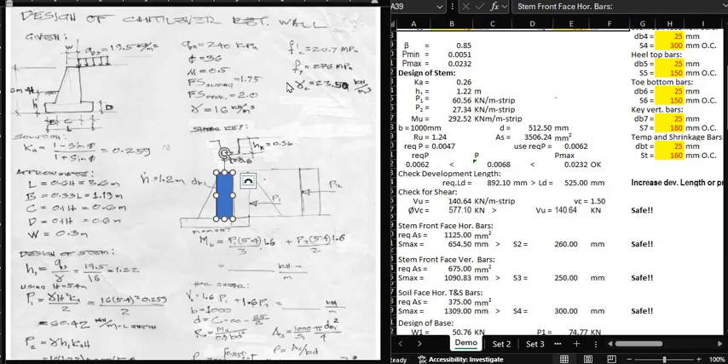Hello, so our retaining wall now is cantilever type. Ito sa left yung pattern and then on the right is the sample. It is termed cantilever in the sense na meron tayong, let's say, meron tayong beam dito. So ayan yung beam, and then naka-fix siya sa baba. Tapos merong lateral load dito sa beam. So ayan yon. And then etong cantilever beam, i-design natin yan as singly reinforced beam.

Okay, so let's look at the dimensions. Ang minimum width ng upper base, W, is 1 foot or 0.3 meters. And then the other dimensions will depend on the overall height, which is the dimension from the base of footing to the top of wall. In this sample, 6 meters siya. Yan yung capital H.

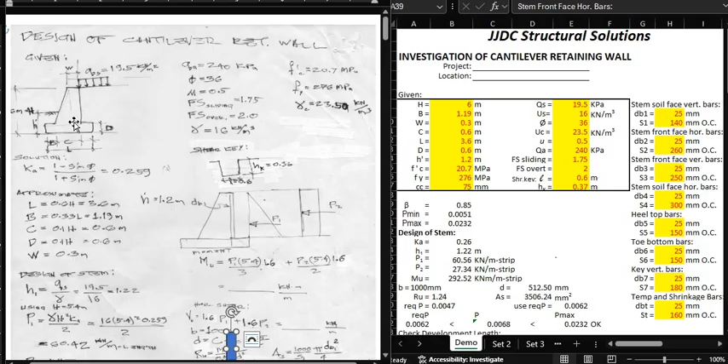And then, yung length or the footing dimension L is 0.6H or 3.6 meters. Tapos, by the way, yung parts ng retaining wall, you have the stem, which is yung cantilever beam niya, yan yung stem. Tapos dito yung heel, kumbaga yung sakong ng paa, and then ito yung toe, yan yung kuko ng paa. Okay, so this is the stem, this is the heel, and then the toe. Now, the B, which is the length of the toe, is 1/3 of L, or this is 1.19.

By the way, these dimensions are approximate only. And then yung C, which is the lower base of the stem, is 0.1H or 0.6 meters. And then yung thickness ng footing, D, is 0.1H or 0.6 meters. And then para sa given, naglagay tayo dito ng surcharge na 19.5 kPa.

And looking back here at the sample, ayan na yung mga data natin. So yung mga red, input data yan, ano? So we have H, B, W, C, L, and then D, then yung H prime naman, okay, this is based on your given data. Okay, so ikaw mag-specify ng H prime. And that is the dimension of the soil from the face of the retaining wall measured from the top to the bottom of the footing.

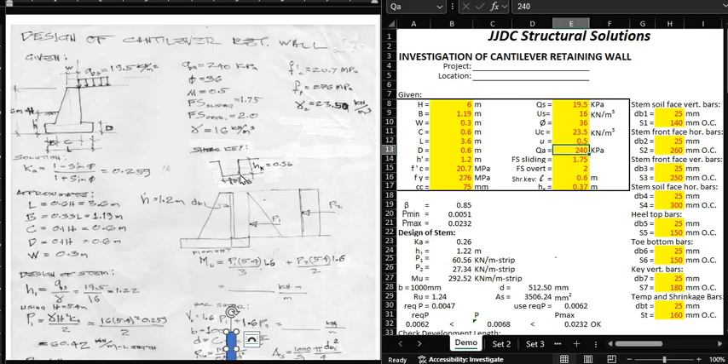And then, your soil bearing pressure, or Q allowable, is 240. And then, factor of safety for sliding, 1.75. And then, overturning, 2. And then, yung dimensions ng shear key, okay, input data na rin ito. That is, the height of key is 0.37. And then, yung length ng shear key is 0.6.

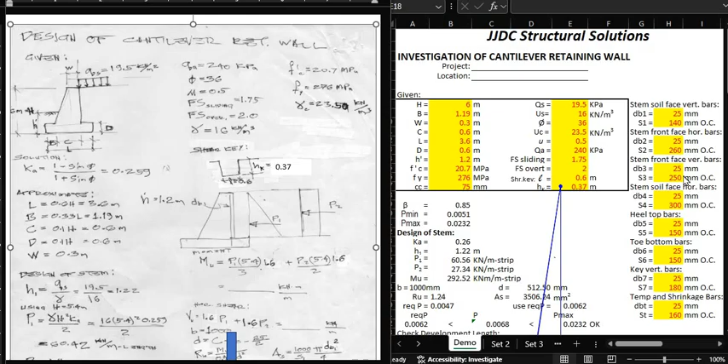And then, let's look at the reinforcements. Dito sa stem, meron tayong soil face, or it is the part of the stem na nakatikit sa retained soil. And then, yung front face, ito yung exposed part ng stem. Okay? So, DB1, this is stem soil face vertical bars, yung solid block na nakatayo. And then you have spacing, S1.

And then stem front face, so dito tayo. Horizontal bars, so yan yun, yung mga bilog-bilog somewhere here sa front. Yan yung DB2. And then DB3, that is stem front face vertical bars, yung solid block dito sa may front face.

And then heel top bars, DB5. So dito yan, yung solid line dito sa may heel. And then toe bottom bars, yan yung DB6. Ito. Okay? Toe bottom bars. And then key vertical bars, DB7. Ayan siya, yung solid block, DB7.

And then lastly, temperature and shrinkage bars, DT. Okay, so meron tayong temperature and shrinkage bars dito sa toe. Then meron din temperature and shrinkage bars dito sa heel, yung mga bilog-bilog na yan. And then dito sa heel, meron ding temperature and shrinkage bars. However, dito sa stem, wala na tayong temperature and shrinkage bars kasi nandyan yung D1, DB1, DB2, DB3, and then DB4.

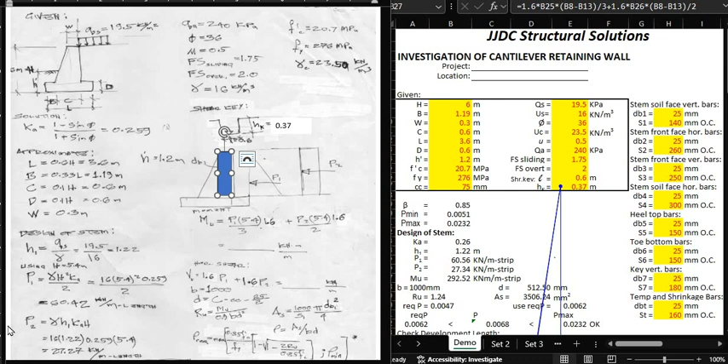By the way, in the pattern it's 60.42, but in the Excel sample it's 60.56. Why is that? Because we didn't use 0.259. But if we use 0.259 exactly for K sub A, it becomes 60.42. I hope you're not confused by that.

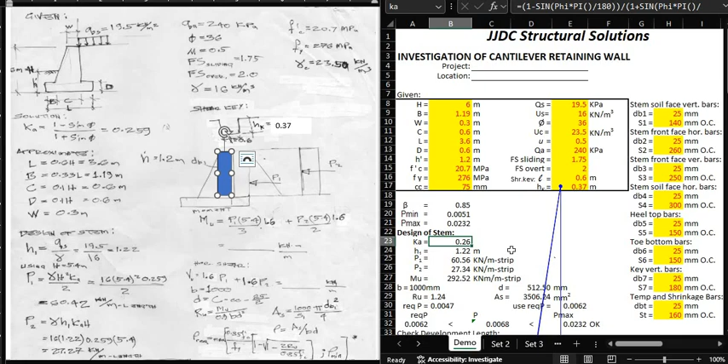Next, we now go to P sub 2, which refers to the surcharge, and that is unit weight times H1 times K sub AH.

Now for P2, instead of using small h1, you can also use surcharge QS times K sub A.

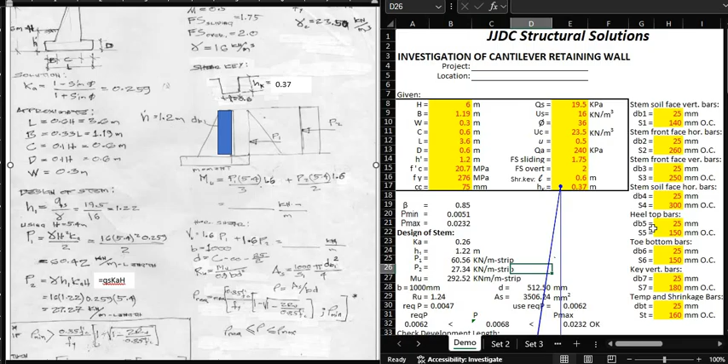So let's check. Let's go to Excel. This equals surcharge times coefficient Ka times the height or thickness H minus D. Enter. See, they're the same, 27.33758.

Now, here we used QS times Ka times H, and our H here is 5.4. Why did we use H1 here, which equals surcharge divided by unit weight? This is in the sense that we converted the surcharge into an equivalent soil load, so we divided the surcharge by the unit weight of soil, which gives 1.22.

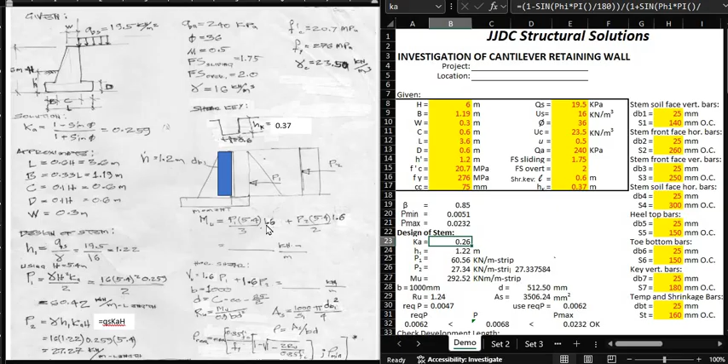Kinonvert ko na siya na 1.6 kasi dito sa surcharge, let's say, kalsada yan, merong mga dumadaan pa rin yan. Kaya nilagay ko siya na 1.6. Mas malaki yung moment na i-produce natin kapag 1.6 ang gagamitin natin. Kaya for conservative reasons, 1.6 na lang ang inilagay ko. And that's how you get M sub U.

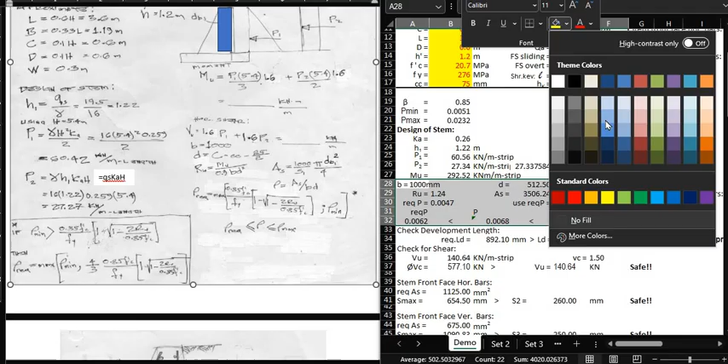Next is dito na tayo ngayon sa design of singly reinforced beam. Let's say meron tayong beam section, ang width niya ay small b, tapos ang effective depth niya ay 512.5. Bakit 1,000 to? Kasi we are considering meter strip. Kaya fix yan na 1,000 mm. Tapos yung D, ayun no, 1,000.

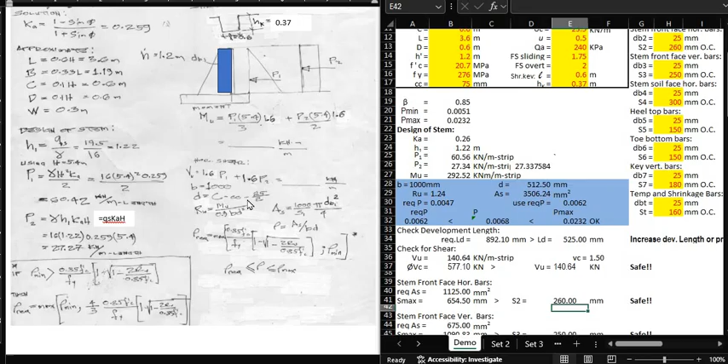And then your D is thickness C minus clear cover minus 25 all over 2. Ang C natin is yung dimension ng lower base. Tapos meron tayong clear cover. Tapos yung 25 all over 2, that is the diameter of

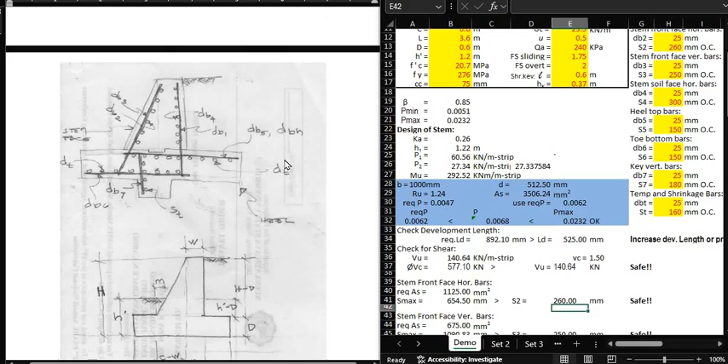DB1. Okay, so check natin kung saan nakalink yan. Ayun siya, nakalink siya kay DB1. Okay, next.

So balikan natin ang design ng singly reinforced beam. First is, sosolvin mo yung R sub U, which is based from MU all over BD squared. And then solvin mo rin yung AS. AS is equal to 1,000 divided by S1 times the area of DB1.

Bakit natin siya dinivide ng S1? Kasi ang ibig sabihin yan, malalaman mo yung number of pieces sa loob ng isang meter strip. So ayan yun, this is linked dito kay DB1 tsaka kay S1.

After which, sosolvin natin si required rho, which is equal to 0.85 f prime c all over fy times 1 minus square root of 1 minus 2 r all over 0.85 f prime c, which is, ayan.

Ngayon, i-compare mo si required rho kay rho minimum. Take note, kapag si required rho ay mas maliit kay rho minimum, no? If required rho is less than the rho minimum, then you have to recompute your required rho, which is the maximum of rho minimum and 4/3 of this equation.

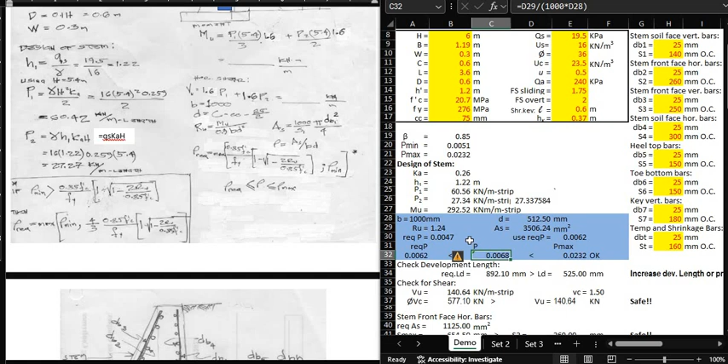Ngayon, kung nag-fail ito, then you have to change your spacing or your bar diameter, or worse, yung mga dimensions natin. After this is check development length.

Siyempre, ang i-check nating development length ay yung DB1, which is ito, yung vertical bars dun sa soil face. Ngayon, ang actual development length is D minus clear cover. Take note na ang development length natin ay yung nandito sa footing, hindi yung nasa stem, kasi obviously mas mahaba itong nandito sa stem.

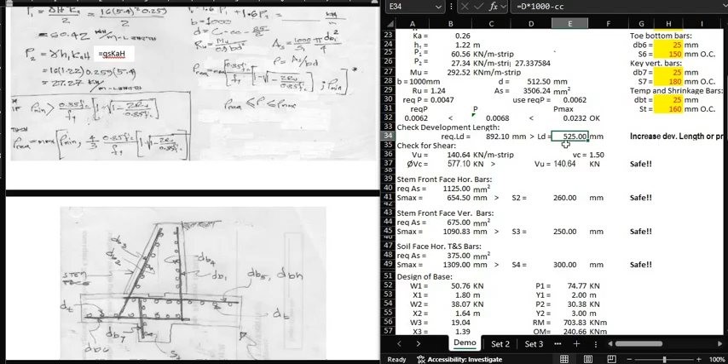Kaya ang checkin natin ay yung critical na development length, which is at the footing, which is equal to D minus clear cover. And your actual development length should be greater than the required development length. How do we compute for the required development length? So eto siya.

It is the maximum of this 1, 2, 3, 4 equations, no? 0.02 dB1 squared. Ang involve natin dito ay si dB1, divided by 4 square root of f prime c, and then 0.06 dB1 fy, tapos 300, tsaka fy psi t psi e dB divided by 2.1 psi, and then square root of f prime c.

However, you be careful with yung 2.1 kasi may possibility again na baka magpalit ito ng 1.7, which is actually ayun, 1.7 nga ang ginamit, no? Hindi siya 2.1, dito 1.7. Okay, next.

Ngayon, napansin natin na yung actual development length is less than the required development length. In that case, ang first defense mo dyan is mag-provide ka ng hook. Kaya naglagay tayo dito ng comment: increase development length or provide hook.

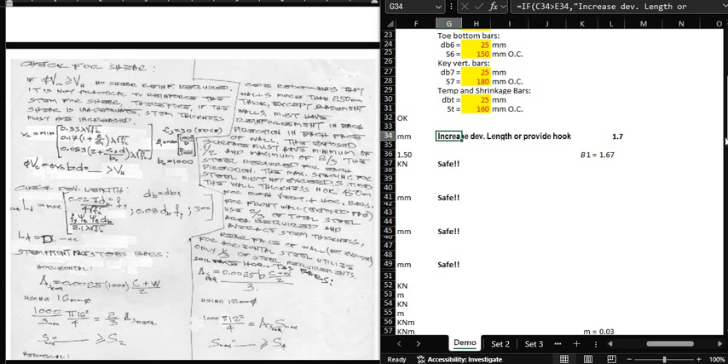Ngayon, dun sa strap footing, eccentric concentric, nag-provide tayo dun ng equations para sa development length, ano? Pero dito hindi ko na nailagay. Dagdagan nyo na lang kung gusto niyo. So yung first defense natin dito ay mag-provide ka ng hook.

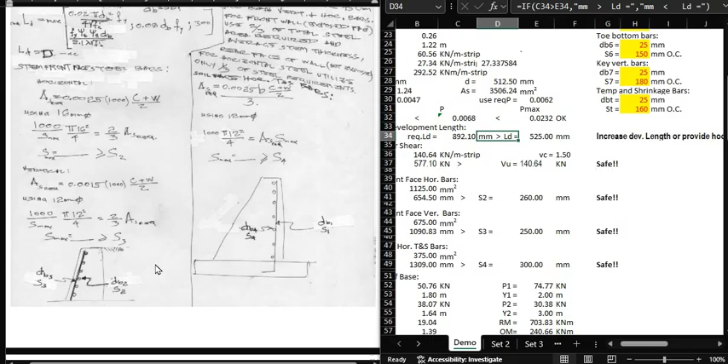Next is, kung kulang pa rin yung hook, then i-extend mo yung development length. Magiging letter L siya dito, or pwede rin mag-letter L siya papunta dito sa kabila as long as na ma-develop yung length.

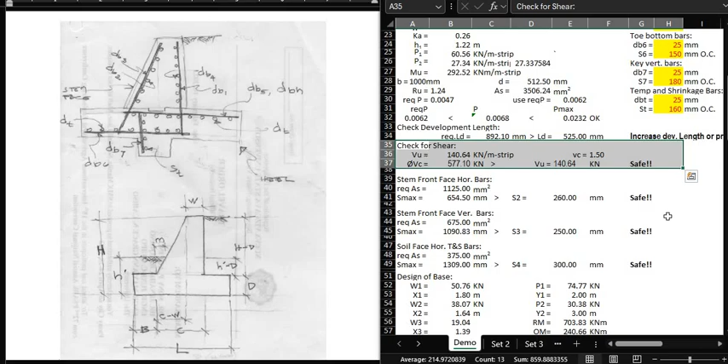Next is check for shear. Babalik tayo dito. VU is 1.6P1 plus 1.6P2. Ang shear na chine-check natin is in between the stem and the footing. So dito mangyayari yung shear. Kaya ang shear force natin is P1 plus P2, multiply that by 1.6, and that is your shear force VU.

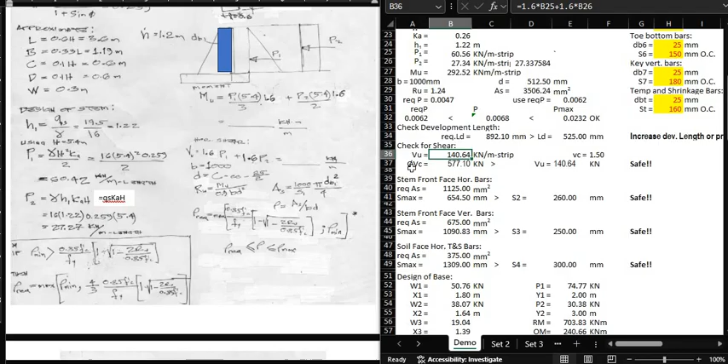Okay, and then how do we get the allowable shear force phi VC? So ito yon, allowable shear force phi VC. Kukunin natin ngayon si allowable shear stress VC, and then you multiply it by capacity reduction factor phi times BD. Take note na itong phi na yan, hindi yan yung angle of internal friction, okay, malilito dyan. This is 0.75.

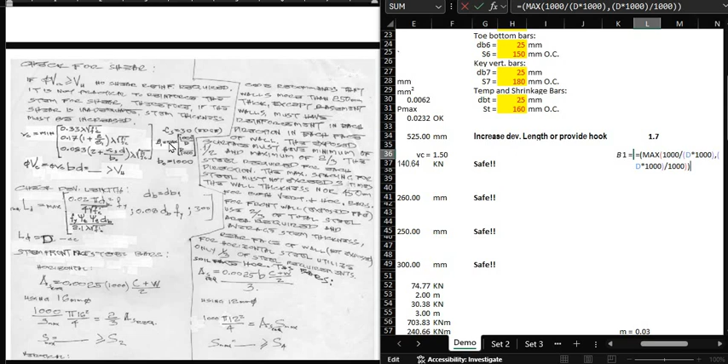Next is ang ating 30, tapos beta 1, kinompute din natin si beta 1. Nandito si beta 1. Maximum, beta 1 is maximum of 1,000 all over D or D all over 1,000.

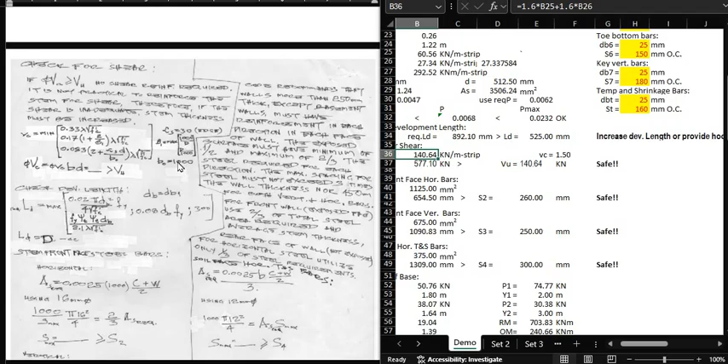Next, ang B sub O or yung shear perimeter is 1, or shear length is 1 meter kasi yan yung meter strip. And then ang allowable shear force natin ay equal to 0.75, yan yung phi, times allowable shear stress VC, eto nakalink siya doon, times B na 1,000, meter strip, times D na 512.5. Then you divide that by 1,000 para maging kilonewton.

Okay, so your allowable shear force is 577, which is greater than your VU. So therefore, it is now safe.

Now let's go to stem front face steel bars, which is dalawa, no? Meron tayong horizontal tsaka vertical. So let's start with the stem front face horizontal bars, which is ito. Stem front face horizontal bars.

So ang AS required natin ay 0.0025 times meter strip times the quantity C plus W all over 2. Ayan po siya.

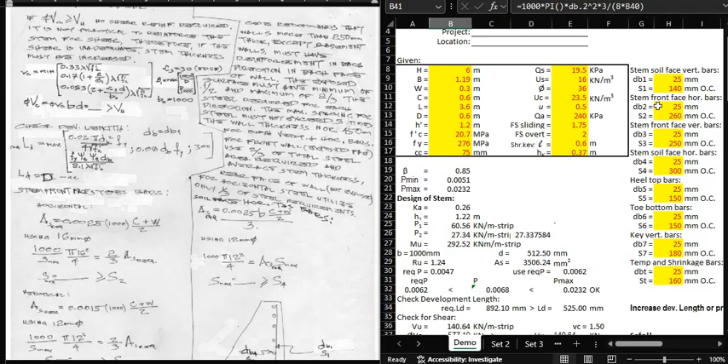And then after which i-compare natin yung spacing. Okay, ngayon ang spacing na i-compare natin dyan is S2. Ayun o, stem front face horizontal bars, which is 260. Okay, next, saan natin kinuha yung S maximum?

Galing yan dito sa required AS. So we will solve now S maximum based on your required AS, which is ayan. So ito yon yung equation na yan. So 1,000 divided by S max times the quantity pi times 16 square all over 4.

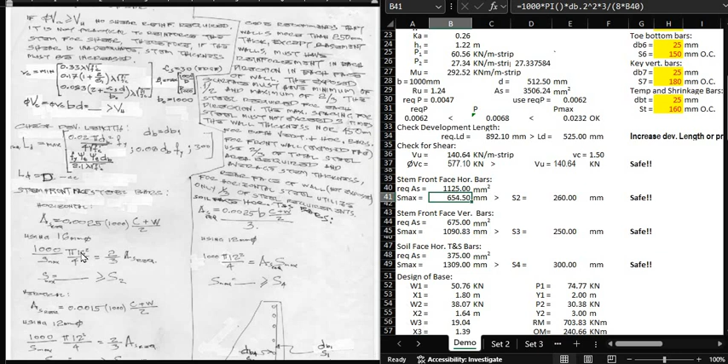Ngayon ano yung 16 na yan? It is the diameter of bar DB2. Ayun, using 16 mm dito. So okay lang, no? Pero dito sa ating sample pattern dito sa Excel, ang ating DB2 ay 25. Kaya ang ginamit ko dyan ay 25 mm. Ayan, nakalink siya kay DB2.

Next, so we will compare this. Your S max should be greater than your S2. Kaya okay lang. Now let's go to vertical bars.

Yan, okay? So dito ang AS required natin is 0.0015 times 1,000 times the quantity C plus W all over 2. Ang gagamitin naman dito sa pattern ay 12 mm.

However, dito sa sample natin, this is now S3. Ang diameter ni DB3 ay 25 pa rin. Okay, so we will use 25 mm here. Kaya ayan, so that is the required AS, and then that is the S max. Then you compare it with S3.

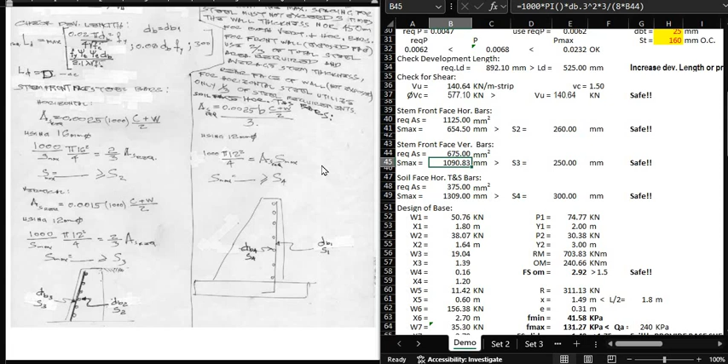Okay, next, finally, dito na tayo sa soil face horizontal temperature and shrinkage bars. So we are now dealing with S4. Before going to temperature and shrinkage bars, balikan muna natin tong mga notes dito.

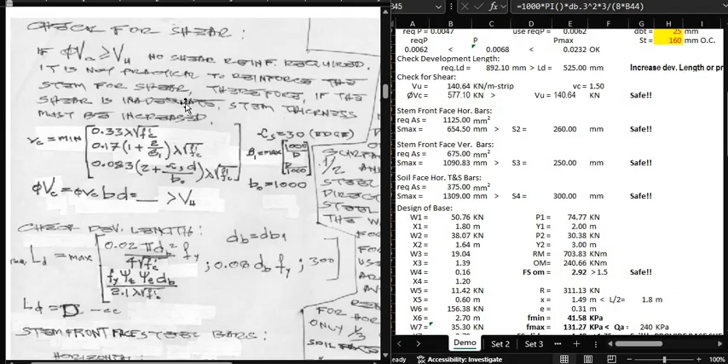If allowable shear force phi VC is greater than actual shear force VU, then no shear reinforcement is required. Ibig sabihin, kaya na nung concrete section alone. It is not practical to reinforce the stem for shear. Therefore, if the shear is inadequate, stem thickness must be increased. Ibig sabihin, yung dimension C ang kailangan mong i-increase.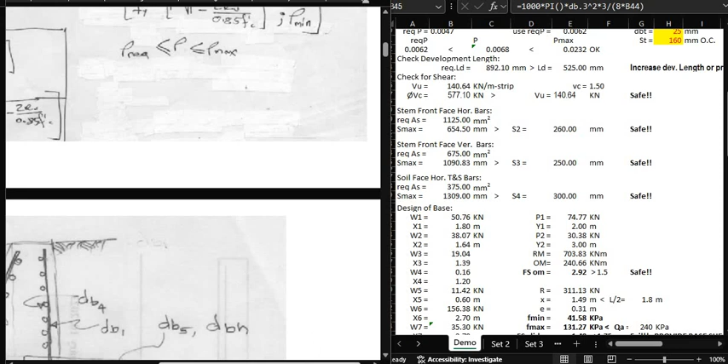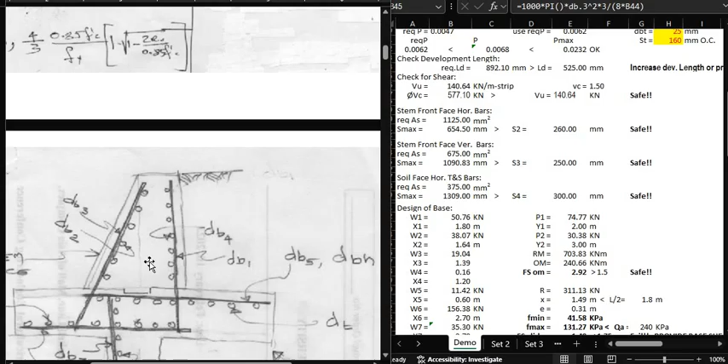Code recommends that walls more than 250 mm thick, except basement walls, must have reinforcement in each direction, in each face of wall. So in both directions, in each face, dito sa soil face meron tayong vertical tsaka meron tayong horizontal. Dito sa stem face naman, meron pa rin tayong vertical, which is DB3, tsaka horizontal na DB2. And then, it is more than 250 mm, kaya both face yan, in both directions. Kaya compliant tayo doon.

Basement walls must have reinforcement in each direction. The exposed surface must have a minimum of 1/2 and maximum of 2/3 the steel required for each direction.

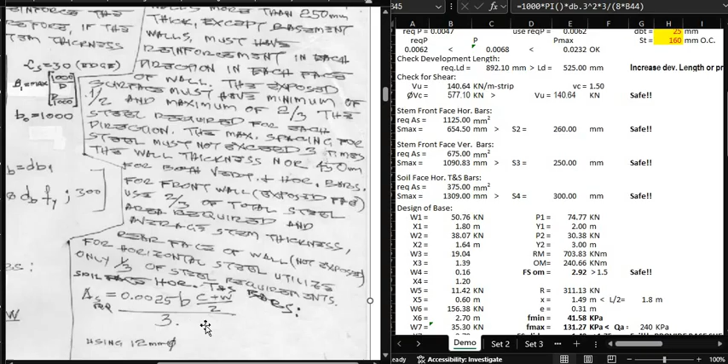Let's go back to temperature and shrinkage bars. The required As is 0.0025 times B. Now that B is the unit meter strip, 1,000 times the quantity C plus W divided by 2, then divided by 3. So that is 375 mm squared.

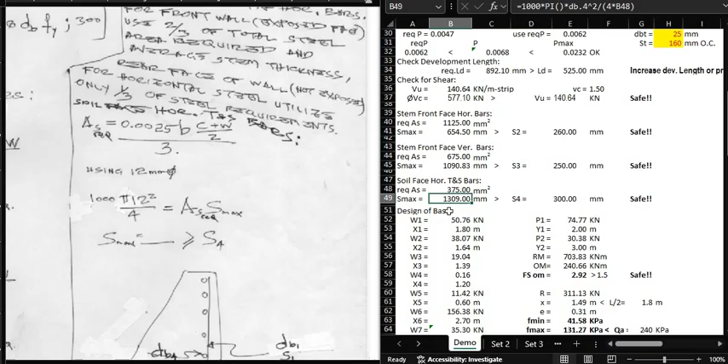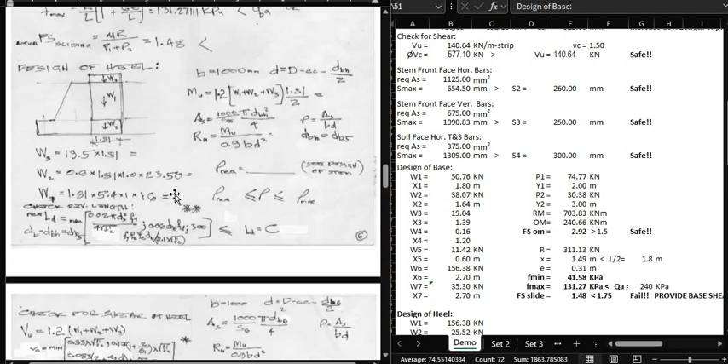Next is design of the base. Our goal is to check the 4 safety factors, starting with overturning, then bearing capacity, then sliding, and what we did first was actually the reinforcement earlier. So let's go now to design of base.

First, we solve for the forces that resist, or oppose the lateral earth pressure forces, which is your frictional force. Now that frictional force is contributed by the gravity loads.

And those gravity loads are the weights of the concrete, the weight of the soil above the stem, and above the stem face. We start with W1, which is 3.6 times 0.6 times 1.

That 1 is the per meter strip, then multiply it by the unit weight of concrete. So that's 50.76. And X1, that's the lever arm of W1, is 3.6 divided by 2.

Next is weight 2 or W2. That is 0.3 times the height, 5.4, times meter strip times unit weight of concrete, and that is 38.07. And its X2 from the toe is...

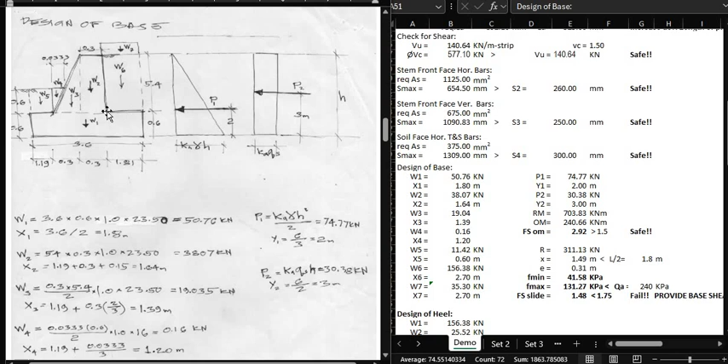Ang lever arm ni W6 is 1.19 plus 0.3 plus 0.3 plus 1.81 divided by 2. Next is yung surcharge na W7. Ang W7 natin ay 19.5 times 1.81 times 1, and ang lever arm niya is same lever arm ng W6, kaya 2.695. Okay, so ito yung mga forces na magko-contribute sa frictional force.

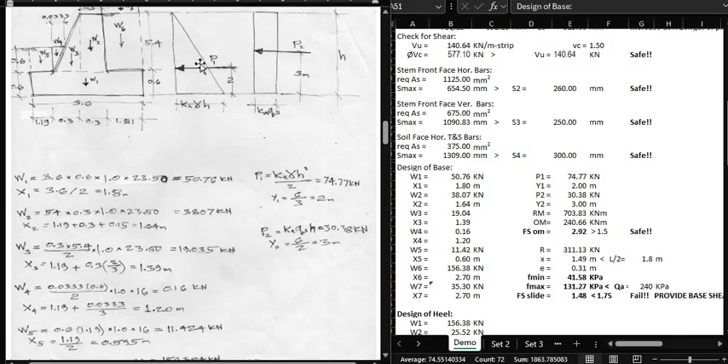And then yung righting moment. Next is yung overturning moment. Yan yung mga magtutumba ng retaining wall, which is dependent on your P1 and P2. Ang gagamitin nating height would be the total height of the wall, which is 6 meters.

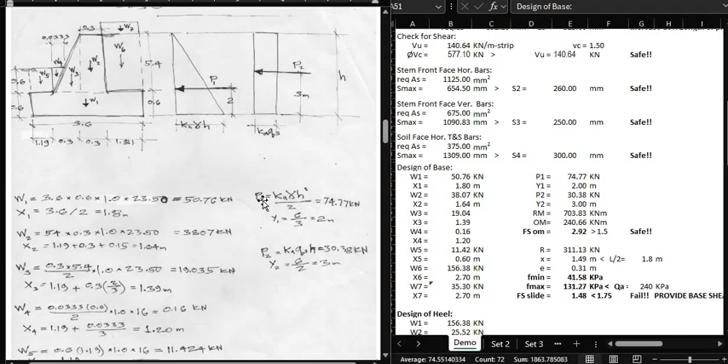Ang P1 natin is K sub A times unit weight times H divided by 2, yan, which is 74.77. K sub A, unit weight of soil, times H squared divided by 2. And then yung kanyang y1 is 6 divided by 3 or 6 times 1/3, kaya siya naging 2 meters.

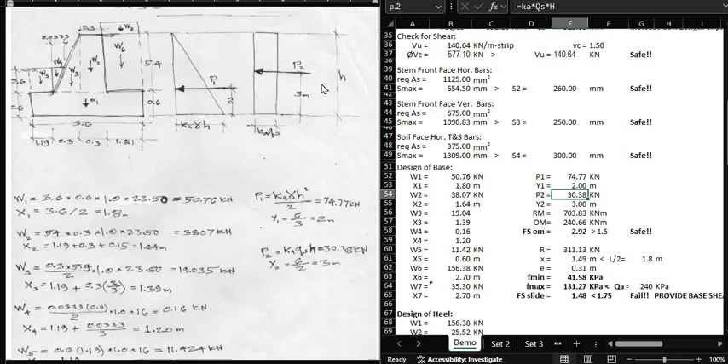And then yung P2, this is due to surcharge, that is K sub A times surcharge times H. Take note, ang small h natin ay 6 meters. Ang lever arm niya ay H all over 2 or 3 meters. And then from there, we can now compute your righting moment tsaka overturning moment.

So ang righting moment is, i-multiply mo yung W1 x1 hanggang W7 times x7 and then you sum that. That's how you get 703.

Sample ko dito, so that is W1 times X1. Tapos copy ko dito. Ngayon eto, nakalink siya dyan. And then yung total niyan is sum.

This should be equal to 703. Okay, next, yung overturning moment naman is yung P1 and P2. So this is P1 times Y1. I will copy this, tsaka yan, and then ito-total ko rin yan. So that is 240.66.

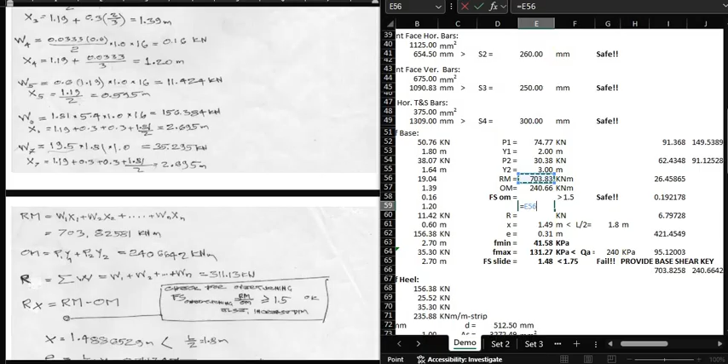So in this part, it is checked for overturning. The factor of safety for overturning is equal to righting moment all over overturning moment. It should be greater than 1.5 or else increase dimension. Kaya itong 2.92, that is equal to Rm divided by Om. So it is greater than 1.5, kaya safe.

Dito na tayo ngayon kay check for bearing. Kunin natin ngayon yung value ng X. It is equal to the difference of the moments divided by the reaction. Okay, so kunin natin si X. Dito ako sa gilid. Is equal to

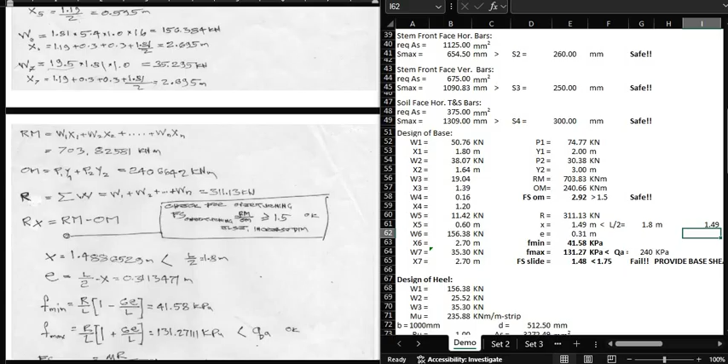Rm minus Om. So parenthesis lang natin yan, divided by R. That's how you get your X na 1.49. And then kunin natin si eccentricity E, which is equal to L all over 2. Nasaan si L? Ayan, divided by

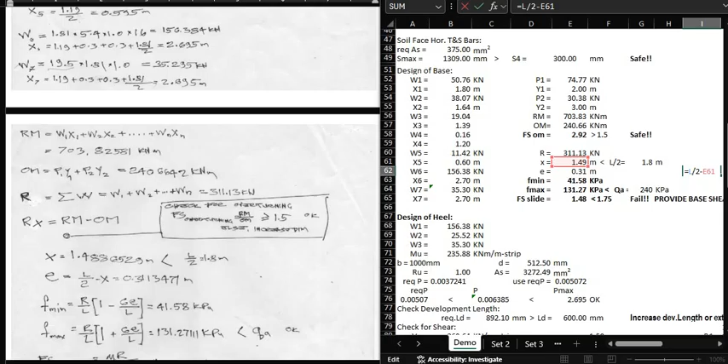2 minus E, and that's how you get, ayan, L all over 2 minus X, that's how you get E, 0.31. Okay, and then from there you can now solve your minimum stress and maximum stress at the soil.

Ngayon yung F minimum tsaka F maximum, both of them should be greater than 0. And both again should be less than Q allowable. Kailangan masatisfy yung dalawang conditions na yun. So therefore, satisfied naman yung dalawang condition, kaya

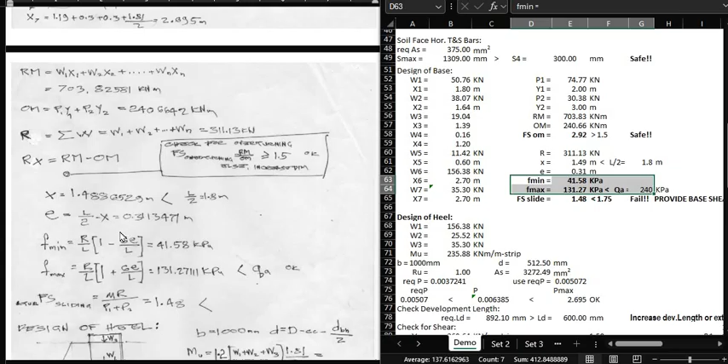Okay next, punta tayo ngayon sa sliding. So natapos na tayo sa overturning. Then tapos din na rin tayo sa bearing. Dito naman tayo ngayon sa sliding.

Sa sliding, ang frictional force natin, F sub F is equal to mu, which is 0.5 times R. Yan, so that's 155 ngayon. I-divide natin yan with summation of P1 and P2. And that is equal to 1.48.

Ngayon bumagsak siya kasi it is less than 1.75. Ngayon saan nanggaling yung 1.75 na yan? Okay, constant yan, 1.75. Ayan, so nilagay ko na yung 1.75.

After that, since hindi siya pumasa, then mag-provide tayo ngayon ng base shear key. So dyan palang gagana itong nilagay nating shear key. However, kung ayaw mong maglagay ng shear key, then magpalit ka ng dimensions. Pwede mong palakihin yung lower base, pwede mong palakihin yung thickness, things like those.

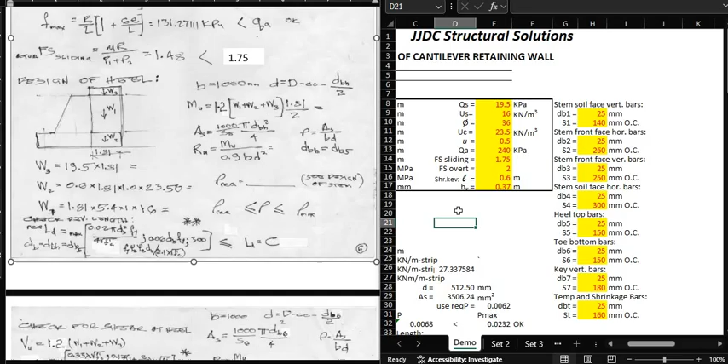Itong provide base shear key, mache-check din natin yan mamaya kasi nandito yan sa design of base shear key. But before that, dito muna tayo sa design of heel. Okay? So, ang heel, ito.

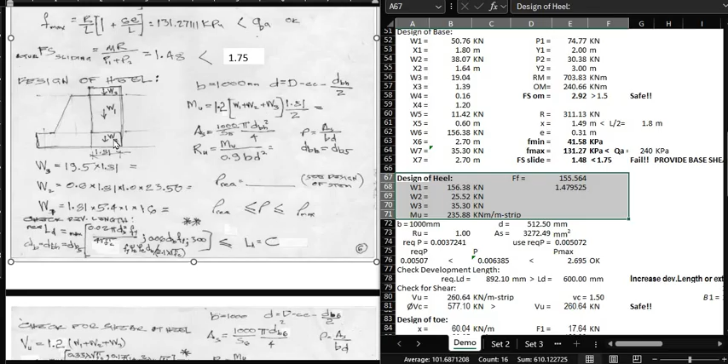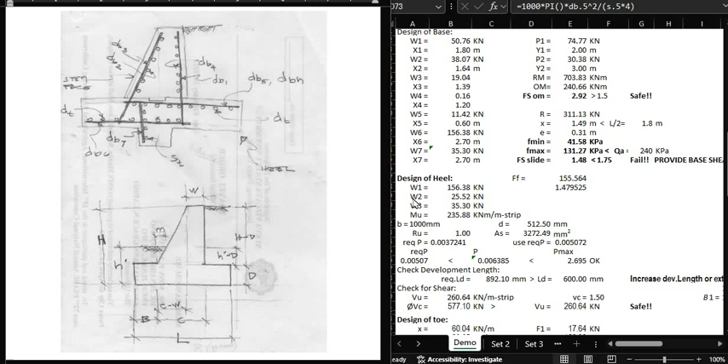So, ang ide-design natin dyan na bakal yung DB5. Kasi take note na meron tayong weight dito, so mag-a-act din itong heel as like cantilever beam. Ang moment dyan would be the weights on top of this. Kaya kukomputin natin ngayon si W1, W2, tsaka si W3, which are coming from this.

Si W1, galing siya sa soil. Tapos yung W2, galing siya sa weight nung heel. And then si W3, yung weight nung surcharge. Okay, so W3 is 19.5 times 1.81.

Ngayon yung 1.81 na yan, yan yung distance na L minus B minus C, times QS. Tapos itong W sub 2, yan yung weight nung heel, that is equal to L minus B minus C times thickness of footing D times unit weight of concrete.

Si W1 ay manggagaling sa weight naman nung soil, which is equal to L minus B minus C, yan yung 1.81, times H minus D. Yung H minus D, ito, from this part up to the top of heel times unit weight of soil.

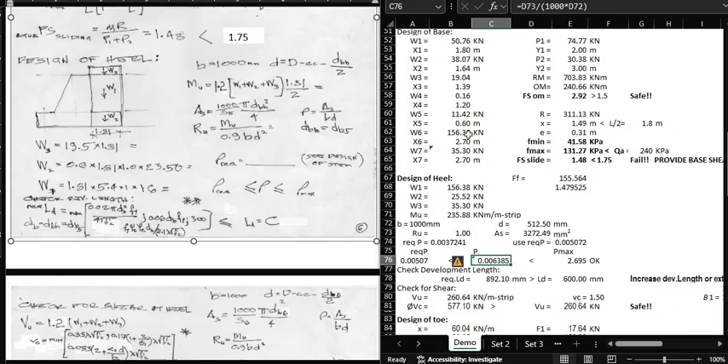After that, i-check din natin yung development length. Ngayon ano ang ating development length? Ang ginamit nating development length is yung dimension C. Kasi yung heel rebars is mag-e-extend siya hanggang dito sa ilalim ng lower base, ng stem. So yung dimension C na yan is actually this part, which is 0.6.

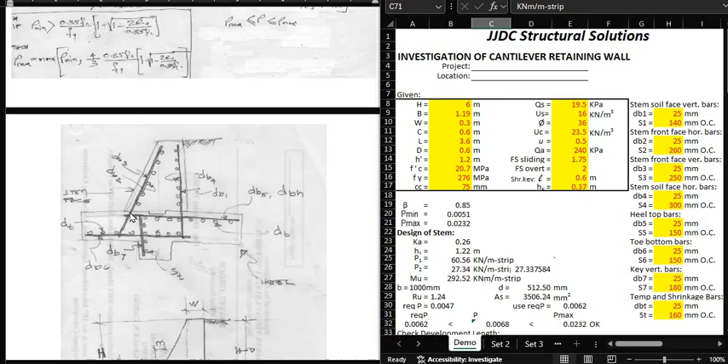Samantalang dito, this is 1.81. So ang check natin is yung critical, which is dimension C. Take note na hindi na natin siya minus ng clear cover.

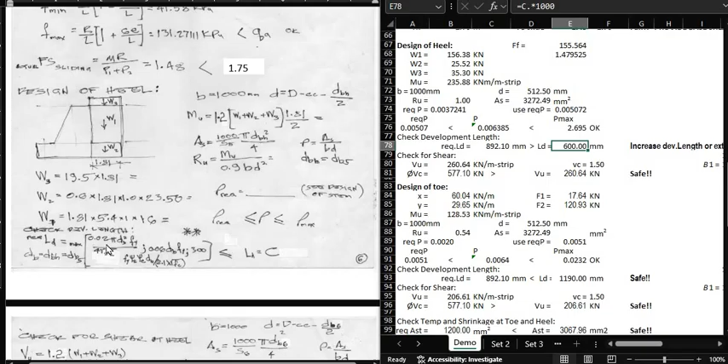And then ang required LD niya is eto. It is the maximum of this 4 conditions again. Okay, ayan. Pero ang isasali nating diameter dito is dB5. Yan, and then lumalabas again na ang required LD ay mas malaki kaysa sa development length.

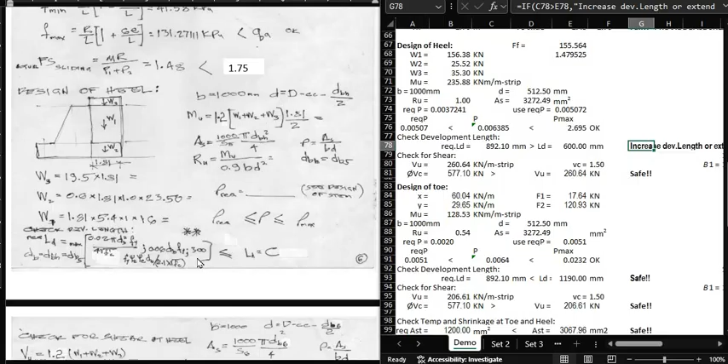So ang comment mo dito ngayon, increase development length or extend to toe. Ayan, so ang ibig sabihin niyan, etong rebars natin na dB5, i-extend mo yan, idire-diretso mo na yan, hanggang dito sa toe. Yun, so para ma-satisfy niya yung LD.

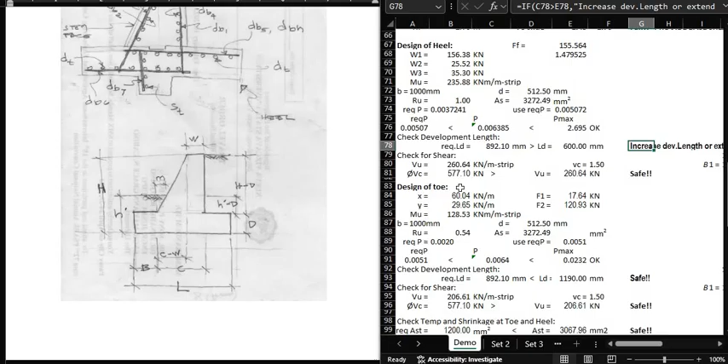Okay, next, punta tayo ngayon kay shear. Ang possible na mangyayari dito ay dyan siya mag-shear, due to the force contributed by the weight. So dito na tayo, check for shear. So ang ating shear force ay manggagaling dito, 1.2 times W1 plus W2 plus W3.

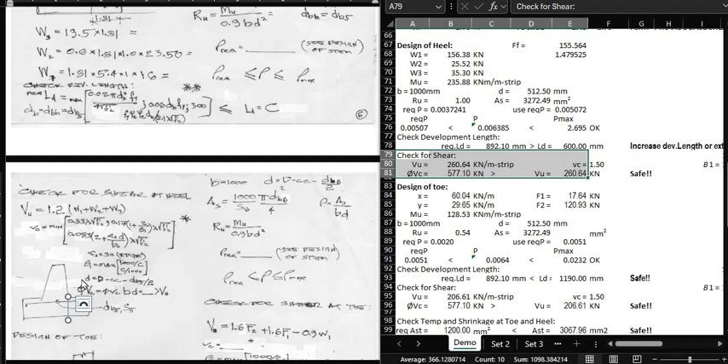Tapos ang shear stress natin, VC. And then meron tayong beta 1. Meron din tayong effective depth D. Ngayon ang effective depth D natin dito ay thickness of footing D minus clear cover minus diameter of rebar, which is dB5 divided by 2. Okay, and then you compute your VC. Then you compute your VU. Next, punta na tayo ngayon kay design of toe.